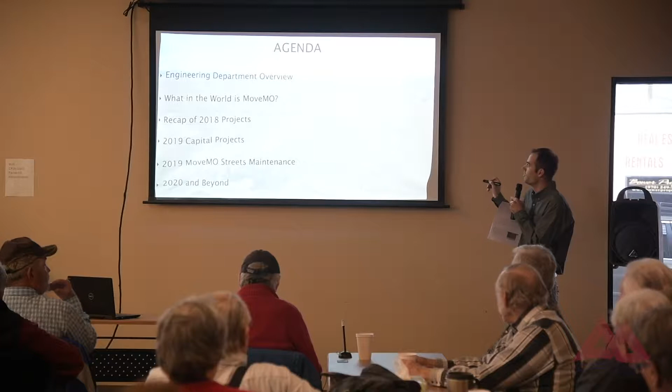She kind of touched on it in the intro, but I'll go in real quick on how the engineering department is set up in the city organization, and what that means for projects and how they come about. MoveMo is kind of a weird name, so we'll talk about what that is, and then dive into a recap of last year's projects, this year's projects, and even going beyond into 2020, some of our longer range planning.

So, engineering, we're right here. This is the city's org chart. We're kind of a lone wolf out here, don't have anybody below us, but we work for essentially the whole city. The Streets department takes care of their street maintenance and day-to-day operations. Utilities takes care of a lot of their main operations. But whenever a project gets large enough that we're having contracted design and construction, generally that's when we take it. We'll manage projects usually over $500,000. We manage those all through design and construction, then also all the construction management and construction inspection is handled by our department. So for everything we'll be talking about today, if you have any complaints, I'm the guy.

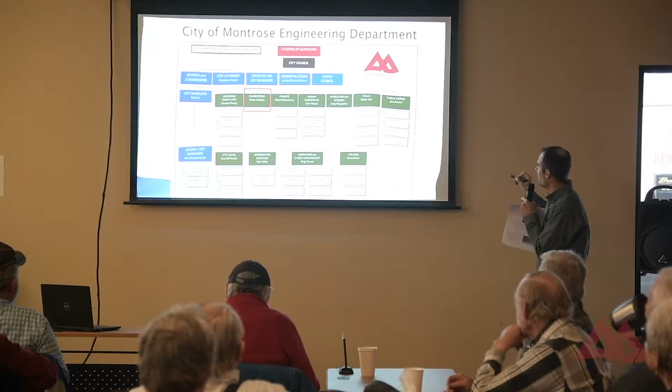And then Public Works was reorganized about a year ago. So we have the Public Works Manager, which is Jim Scheid. They take care of fleet, parks, streets, trash and recycling, and then utilities is its own division—sewer, wastewater, and water distribution. And again, we kind of support them through the larger projects.

So what the heck is MoveMo? Why did we give it such a weird name? It stands for Moving Montrose Forward. Initially it was going to be Move Mofo, and we thought—I liked it—but everybody else thought that was a bad idea, and it wasn't original; everybody uses that when driving around already anyway. So we changed it to MoveMo. We have a website, movemo.co, which I'll show you. The CO, I think, is for Colorado, so you can do anything with website names these days, I guess.

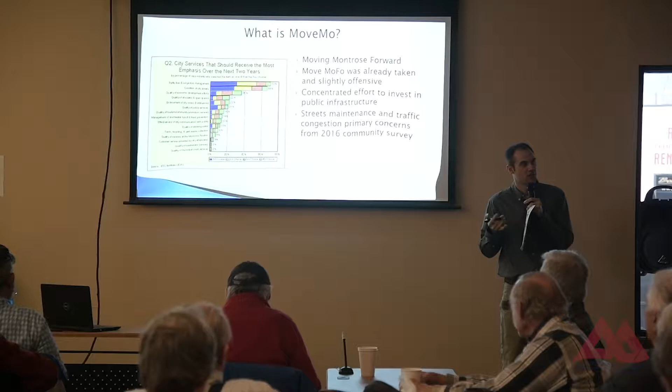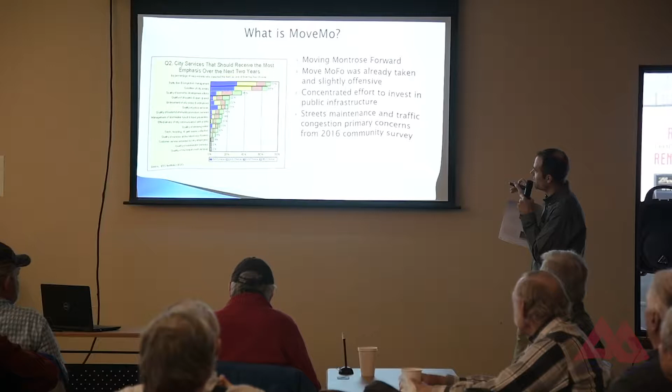But it's kind of a branded effort that came out of, mostly started with, we've known the importance of infrastructure and investing in infrastructure. The recession hit us, just like many rural communities, pretty hard, and we're behind, just like everybody. And people noticed. So the community survey in 2016 asked what people wanted to see the most attention given toward: traffic flow and congestion management, 70%; condition of city streets, 66%; and then all this other unimportant stuff below that.

But the take home, and I was just kidding, that's important.

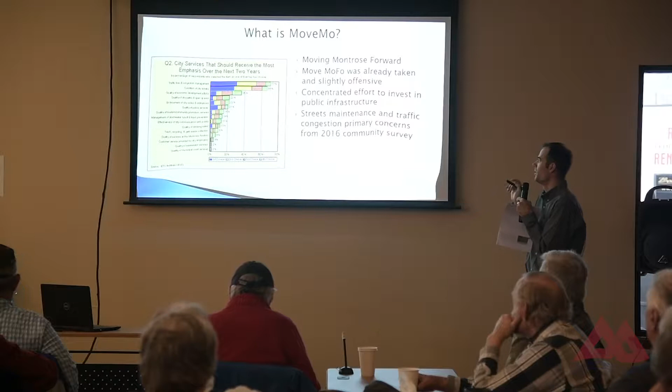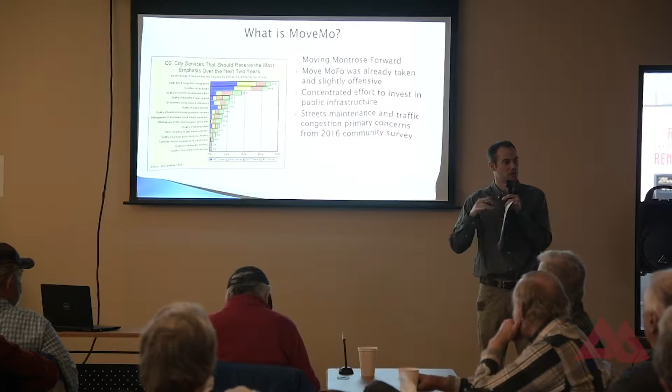The take home here is, by far, you can see how far these lines are from everything else that people care about our streets and don't want to be stuck in traffic, and they're looking for us to fix that. So in response, we've done a concentrated effort to include reallocation of funds, some loan money to try to catch up on the backlog, because as a city we generally have almost no debt, which is great for a municipality, and gives us good opportunities.

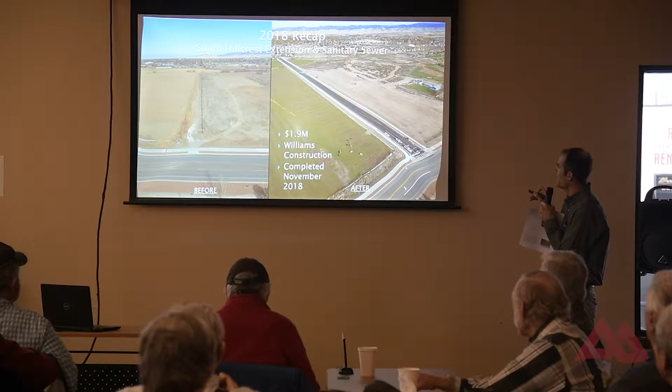Going into 2018, if you remember what South Hillcrest used to look like, this is the before and after. This was completed last November. Came in at 1.9 million, original contract was 2.0 million, so had some cost savings there. They did have to do a little bit of work on the bridge to fix some of the patch work they did incorrectly, and there's a little warranty work left, but beyond that the project is generally complete.

So the Colorado Outdoors project is about 170 acres. The central 40 are now complete, final platted, and lots are ready to go for this project. Great timeline on that.

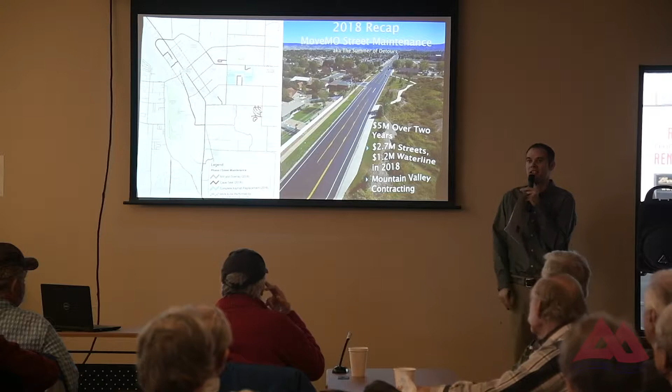You've noticed on some of these, South Hillcrest and Niagara here, we did some additional parking bulb outs. What we've done is reconfigure to our typical template - this has become our standard go-to road template: a through lane in each direction, dedicated left turn lanes to improve volume and safety, and dedicated bike lanes on each side. Between this and what we did up at Rio Grande Park, we added about 3 miles of bike lanes last year, which is great for our bike network - and it's essentially free, since you're striping the road anyway.

Getting a critical mass to the network so that biking becomes more and more prominent, and starting to get connectivity and get rid of all these dead ends.

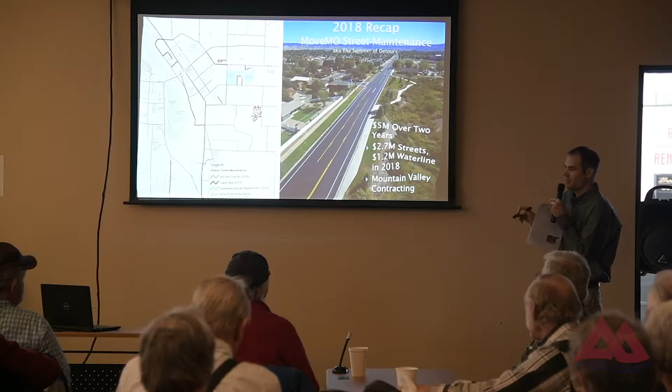Some of the other stuff from 2018 was what was called a Cape Seal. One of the unfortunate things about a Cape Seal is it's black, so everybody thinks it's a pavement overlay, and it's not. It was essentially a fancy chip seal, so we chip seal the road and then put this slurry seal on top, which is a black fine aggregate.

Like Rio Grande, Grand Avenue on the north end, some of these streets, especially Rio Grande, we don't want to invest too much money in because eventually this will get turned into an arterial and completely rebuilt. We don't want to spend a lot if in 10 years we're just going to tear it back out. Some people said Rio Grande is rough, and it is, but it's a matter of using that asset best so we don't waste money and end up taking it back out.

I think that's about it for 2018. There's a lot of utility work—that's what took so long on Niagara and Hillcrest. We have old transite water pipes, usually about 50 years old, or with a life of about 50 years, and a lot of them are 50 years old, which is job security, I guess.

But anytime we do these major overlay projects, we try and replace the utilities while we're at it so we don't have to come back. As luck would have it, with my last name being Murphy, the water line would break the day after you open the road, and then we'd all be in trouble. So we're just trying to look ahead on that. That was the big stuff for 2018.

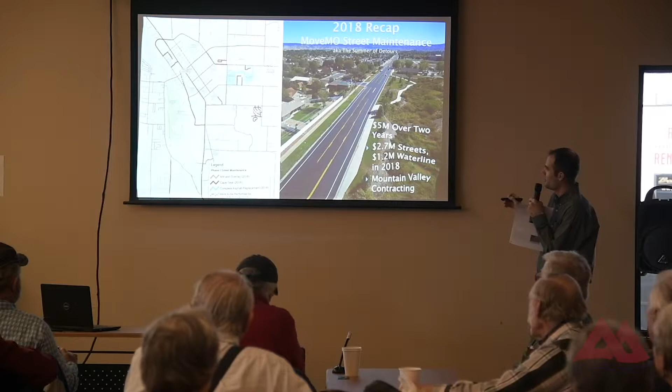There was some smaller stuff, but we've got too much to talk about in 2019, so we'll move on.

Diving into 2019's projects, this is one of the utility projects. You guys may have noticed some digging going along the rec trail down here by Stover's—this is Stover's chocolate factory here. It's kind of tilted on its side, so Townsend runs along the north, and Target is down here.

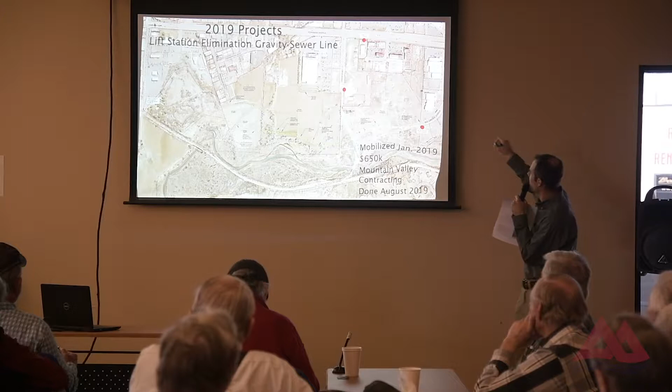Back in the day, they built this development, Home Depot, and River Landing, and with multiple landowners coming across here, they could never get the easements worked out to get a sewer line across. Typically along here, any city will have a trunk line along the river that flows by gravity you can dump all the sewage into. For these, they couldn't get down there, so all of these are on individual lift stations that pipe to a lift station and pump down to the gravity system here.

This one pumps out and down. This one actually pumps all the way across Townsend, all the way down to Oxbow, Williams, Oxbow, and then down by the rec center, which is amazing that was more cost effective at the time than dealing with the landowner issues here. Through two years of working on this, we've gotten through the landowner issues.

We're now putting in a trunk sewer line along what will eventually be the extension of Rio Grande. So Rio Grande, right at the Stover factory, turns to East Oak Grove and dumps back out into Townsend. Long term, you'll notice this is also called Rio Grande down at the light by Target—that's by design, so this will snake along here. The sewer takes a jog out there because of the arroyo, but we'll end up connecting ultimately in that alignment.

That's a long ways out, but we're putting the sewer line in the same place now to get that out of the way, because these lift stations cause us a lot of problems with maintenance liability, and they also produce hydrogen sulfide, which is very corrosive on the rest of our system. So it's costing us a lot of money just in degradation of other portions.

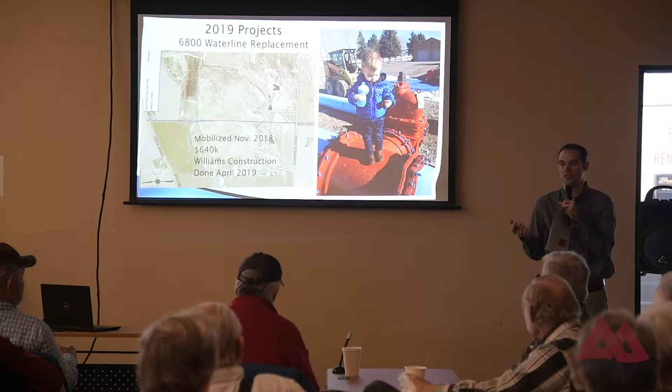Hopefully they'll have that in service here in a couple weeks, which is great. We do these things in the winter to get ahead of it, because summer demand is when our system really needs this kind of capacity. So that's what drove doing these projects in the winter.

Same with the lift station elimination project. In the summer, when they start flood irrigating, the whole valley just saturates from the bottom up, and so deep utility projects get pretty complicated. So we do a lot of our utility work in the winter when the water's lower, and that sets us up to do a lot of our paving first thing in the spring on some of those projects and get those buttoned up before traffic gets even busier.

And this is the fun one. They're all fun. This is the funnest one. We were having fights over who gets to manage the construction of this one. Ryan lost, I'm sorry. So Josh Sickles from our office.

Yeah, so the funnest project. If you look at this map, the blue are our existing parks, the orange are the existing rec trail network. If you notice, there's a lot of awesome stuff right here, but all the people are over here. That's been a problem for the cities. We have this gem, an absolute gem of a park system down here, and no way to get to it, especially for the kiddos.

It really came to light when we were designing this, and I had to stand for 15 minutes just to get across the street here at West Main. And I'm an adult.

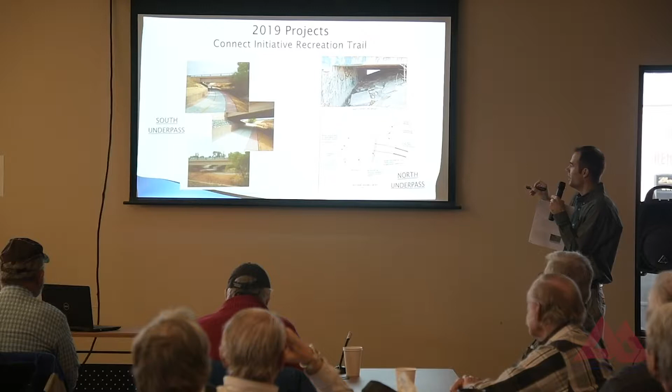This is over the City Market Bridge. This is what this one will look like. This one's got a little more room, so you'll have just a little retaining wall on the uphill side, carving out underneath the bridge. And going back, that work is being done.

So fortunately, going back to all these, Mountain Valley Contracting, Williams Construction, Western Gravel Constructors, all local contractors, which is great. So we're getting all this external money, and we're able to use it not only to keep the money in our community, but also get the skill set and keep good learning opportunities for all of our contractors to have these unique, challenging projects and keep that talent local, in addition to the cost, which is great for future projects.

That work will be done, scheduled to open this winter. Here's a couple pictures of the construction underway.

So this is Mayfly's new building. Kind of had an opportunity to get this retaining wall out of the way. Just a couple pictures out there. These are prefabricated blocks that they just put on a flow fill footing and snaking the trail back through there.

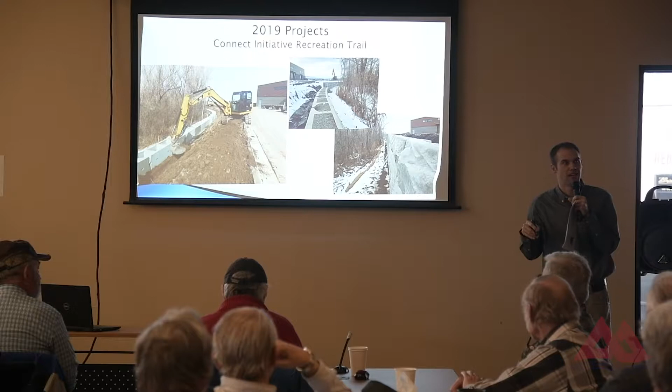That's where it got really tight. A lot of this is up against wetlands, all that river corridor, so we have to map the wetlands and make sure we stay out of them with the project. To mitigate wetlands is $350,000 an acre. So we don't want to go in the wetlands. The wetlands are good. We want to keep them.

The other number 2 fun project for the summer, the Miami Hillcrest Roundabout. So this picture shows the footprint of the roundabout. You can see it's a pretty big project.

So it starts all the way up here, past the north end of the Crossroads Church here, goes all the way down to Cherry Street, and then both ways here. It's a lot larger diameter.

It's about the same diameter as the one on Woodgate because of the skew. So you have a pretty skewed intersection, so to be able to still get your trucks through there and maintain all of your geometry to meet standards, it ends up being pretty big.

And then all the really fun stuff. So all these lines are the various utilities that'll be installed as part of that work. So people always ask, can't we keep it open and do it half at a time? And that's the reason we can't. It can be done, but it would add $500,000 to the project.

So we just kind of bite the bullet and get it done quick. We've just advertised that. Talked to council Monday, they're scheduled to vote on contract award mid-March. It's a $1.7 million contract.

This is K&D Construction. We've never worked with them before, but they come on good recommendation. They're out of Junction. But they're using Bernhardt Construction for concrete and Chuck Distal for a lot of the utility work, so a lot of that work still will stay local, which is great.

We're doing this one a little unique. We gave them a closure window, and we actually negotiated it down to 4.5 months. So once they close the road, they have 4.5 months to open it, and done before November. We're still working out that schedule, but I'd guess about mid-April you can expect this to be closed.

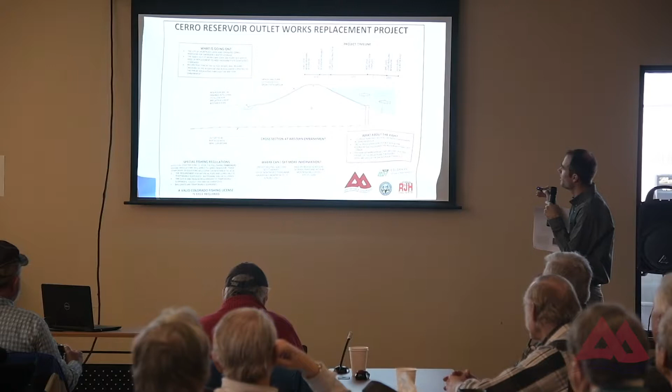Built in 1912, so as you can imagine, stuff built then is about at the end of its life. It has an old 8-inch pipe, part steel, part transite, underneath the embankment, down 50 feet from the top to get to the pipe. That's undersized, essentially at the end of its life, and needs to be replaced.

We don't use this reservoir primarily for our drinking water. Most of it comes to Project 7 through the Gunnison Tunnel, with trans-basin diversions, because our rights sit with Ridgway Reservoir on or through Tri-County. But we do hold some rights to this as an emergency. If all other supply failed, say worst case the Gunnison Tunnel collapsed, this could keep us in water for a month, maybe 3 weeks, or even 3 months.

We drained it this summer. The reservoir also doubles as a state wildlife area now. Through an agreement, we traded out Chipeta Lake for this. It's managed by CPW for the fishery, and we're working with them to reestablish the fishery when this is done.

We drained the reservoir slowly over the summer, because if you drain it too fast you end up with water trapped in the sides, and you don't want it to cave in.

It worked out really well, gravity was on our side. We were able to do a siphon up and over the top of the dam. Once primed, just like siphoning out a water bed or a swimming pool, it flowed completely on its own under gravity. We were able to dump all this water into the Vernal Mesa Canal, or Vernal Mesa Ditch I think they call it, which goes out to Bostwick Park for irrigation water.

So none of the water was lost, which is a good thing, especially last year. It's just that much more water they're able to use, because Silverjack dried up pretty quick.

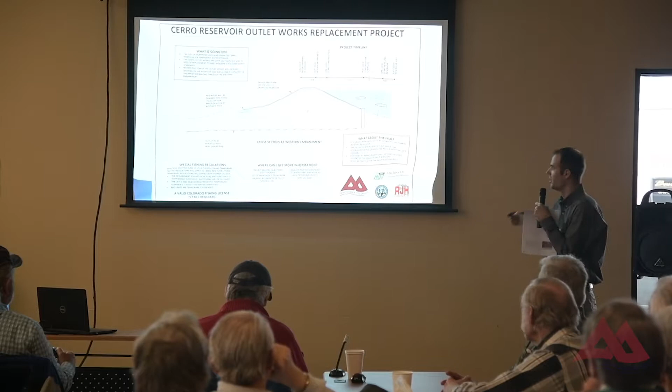That work is being managed by RJH Consultants out of the Front Range. Usually we manage all of our own projects and inspections because it's state regulated, and that's a whole other level of oversight. So for this one we've actually hired consultants, and it's kind of turnkey. They're taking care of that project.

You can expect it to be refilled next spring. By the time we get done and get acceptance and an order from the state to refill, the water will be off for the year, because it's filled off of the water that comes out of Silverjack. So that'll happen next spring, and then we'll reestablish the fishery with CPW.

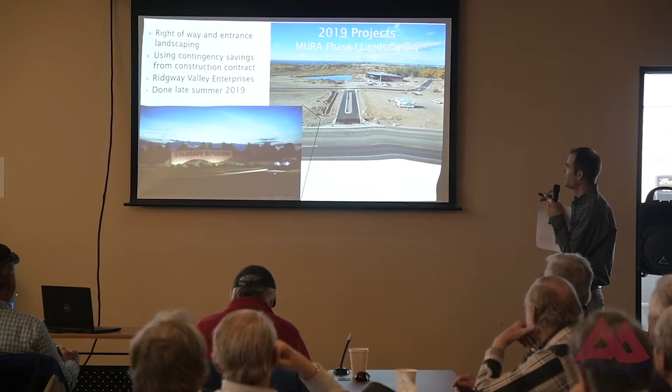Out on the MURA, this is Mayfly's building. Like I said, we saved about $800,000 in the original construction contract.

That's now kind of freed up for some of the common area landscaping. So this is the entrance, monument signage, kind of landscaping that'll happen on both entry areas, and then we'll probably do the right-of-way within our street landscaping. As buildings come online, they'll individually landscape their own frontages. That work will be going on this summer.

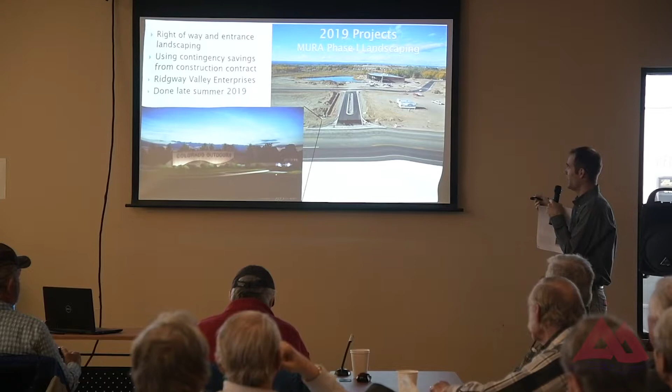Beyond that, most of the URA work is complete.

Another group project, River Bottom Drive. This is Holly Park, one of our rougher parks in town, I think built in the 1970s. Is anybody from the Rec District here? Through their community surveys, it was one of the highest priorities.

And then River Bottom Drive, we've all been on that. We all know how fun that is, trying to get out of an event.

So we teamed up, went after DOLA money, went out to— what was the name of it, Burlington, go to Kansas and turn around— for an interview with DOLA, and got $500,000 from them.

And that was Barbara's joke, by the way. I gotta give credit.

Everything looks to be a go. So we probably start after all the programming is done in September, get a lot of the base work done. The county also partnered on this project.

To get the full template in here: get sidewalks down both sides, formal on-street parking, pipe the ditch, solve a lot of the safety issues, dedicated pedestrian crossing, flashing crossing, get the intersection lined up so it's square so you can get out safely, get dedicated right turn lanes. Really just make this what it needs to be, because we have this gem of a park system and a not so gem entrance.

And then combined with a lot of the improvements at Holly Park, the Rec District will be doing their project independently. We'll bid them at the same time, and then the city will be managing the street construction. The goal is to get that at least based before spring soccer.

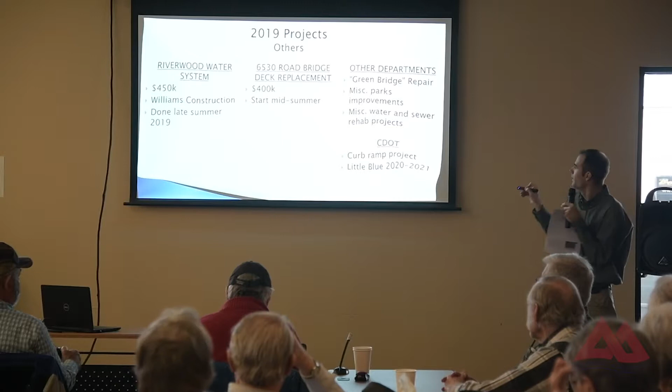Parks is looking to repair or replace the Green Bridge, the one off of Home Depot - the rec trail across the Uncompahgre River just behind Home Depot. That's the rail car one - it was an old rail car. A couple small parks projects, water and sewer rehab, typical stuff.

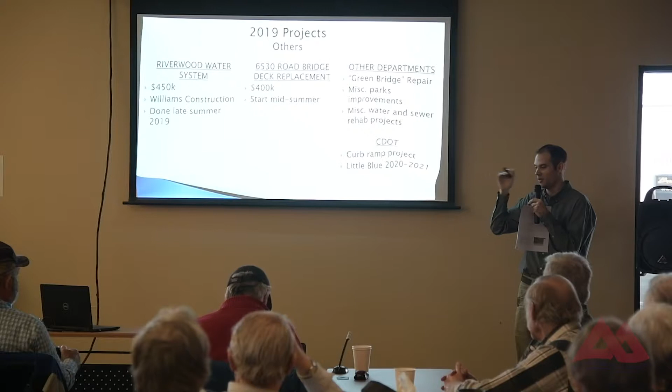Also a plug for CDOT - you'll probably see late summer they're doing a ramp project on San Juan, Townsend, and West Main to replace a lot of the curb ramps, ADA ramps on the sidewalks to make those compliant. A lot of those are non-existent or non-compliant.

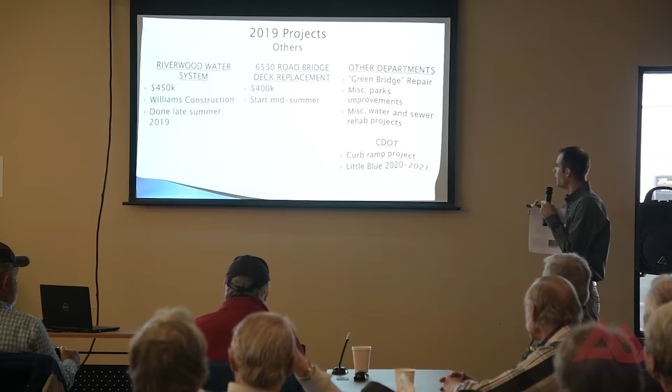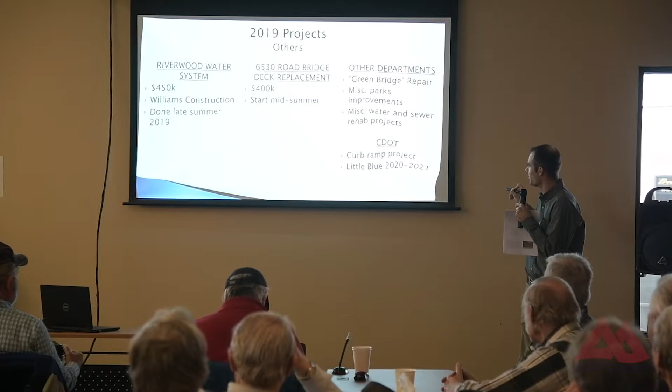And then the fun, or hot button one - Little Blue, still looking like 2020 on that, where they might have intermittent closures of Highway 50. They're still working out the details on how and when all that happens. I've generally been out of that loop, but I just wanted to let you guys know it's coming. There's a website for that if you want more detail on the project. But that one will be pretty impactful to our community.

So, it's a long project. I'm tired just talking about it.

So then the other piece, like I said earlier, we have $2.3 million left for street maintenance this year. And what we're trying to do is spread the love, so hit a lot of places in town, all throughout town, not just any one area.

And there's some roads that are admittedly pretty bad, that have probably fallen off the cliff. So you have this condition curve, and you hit a point here where you just fall off the cliff. It's like painting your house - it's cheaper to paint your house than to replace your siding.

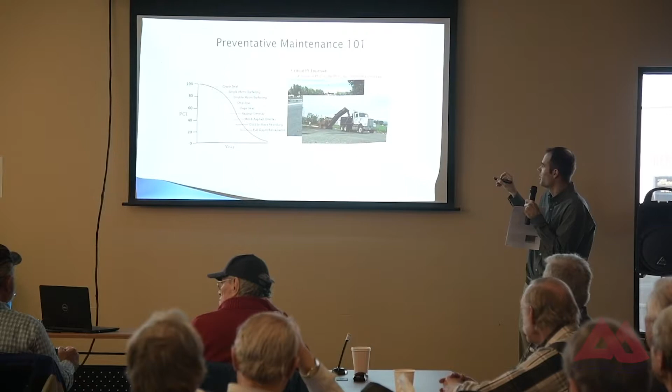And so we have some that we can bring back by small, cheaper surface treatments. So at the top here, that's where you fall off the edge. At the top you have crack seal, chip seal, some of these cheaper mill and overlays, some of these cheaper treatments. But once that fails you, then you're into this - up here you're $1 a square yard, down here you're $15 a square yard.

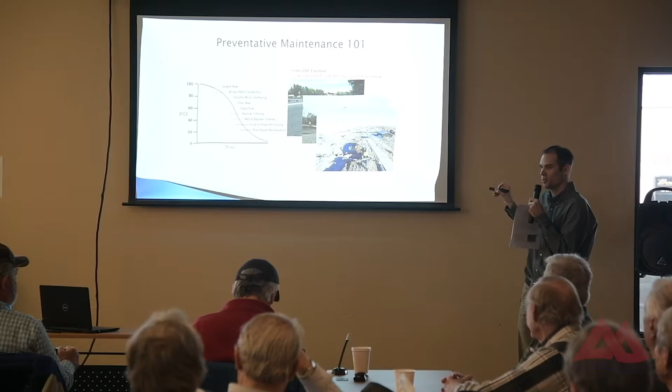So, kind of the adage on street maintenance is bad roads stay bad for a long time, unfortunately, because if funds are limited, we're going to spend them keeping the other ones from falling off the cliff. Because if we just fix the ones that fall off the cliff, they'll all fall off the cliff. And it's not probably unique to Montrose. A lot of communities have all these road networks, and it's a challenge to keep them up, admittedly.

We use ground penetrating radar, which is a little machine they run behind to look at pavement thicknesses. Ryan, back when he was in the streets department, would do this horribly complicated spreadsheet, just to give you a feel for the work that goes into it.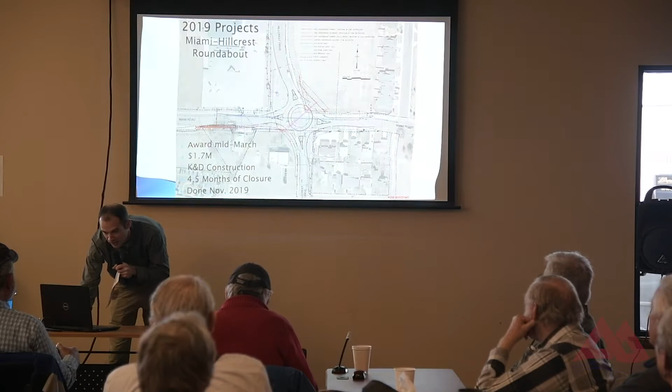So anyway, this is the work that goes into the prioritization of streets and the modeling of how much money we need to be throwing at it and where to put our best bang for our buck on our money. I would never dream to - this is a Ryan thing, he's the mastermind behind this. If you have questions about this spreadsheet, feel free to ask him. But at the end of the day, there's a lot of work that goes into figuring out where to spend the dollars and spend them right, because admittedly, I think we know we'll never have enough to get it all, and so we got to do the best we can with the resources we do have.

A couple chip seals, overlay Odell if funds allow - and that's the caveat on this. We have 2.3 million and we'll go until we run out of money, so we're prioritizing within this list. So some of the stuff you see on here may not get done.

Pavilion's another big one. Anybody's driven out Pavilion lately, that one's in pretty rough shape. And that's the definition of right on the verge - in a couple, 2-3 years, Pavilion would get pretty bad.

And then crack sealing - crack sealing is kind of your best bang for your buck. So we're going to do a lot of catch-up crack sealing contracts, some of it trying to hit a lot of old town, and then city crews doing some of this work, because that's up in your dollar square foot range versus 15. So the single most important thing we do, in my mind, is crack sealing, and we just need to stay ahead of it. And then the in-house stuff, that's all done by the streets department.

So here's the website, movemo.co. It'll redirect you there, or you can just type in movemo.co directly. You'll find project updates, closure notices, and you can peruse current capital projects with before and after pictures of recent work. There are also maps you can click around on for street maintenance info, so if you forget what we tell you, you can click on the streets to see what's going on. We try to update that, and during construction it gets updated weekly, sometimes several times a week.

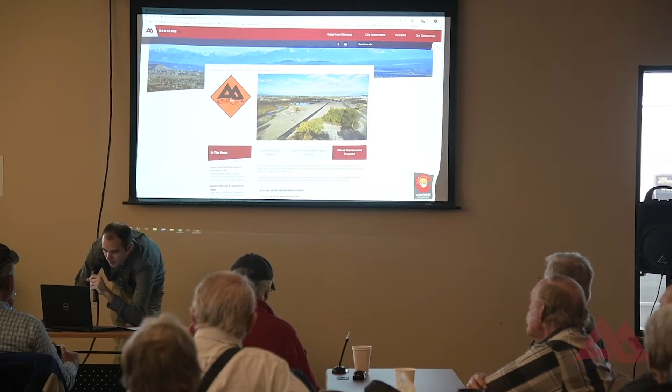All right, now I've got to figure out how to get to the other part. Then we're almost done, that's the good news. Everybody's getting tired.

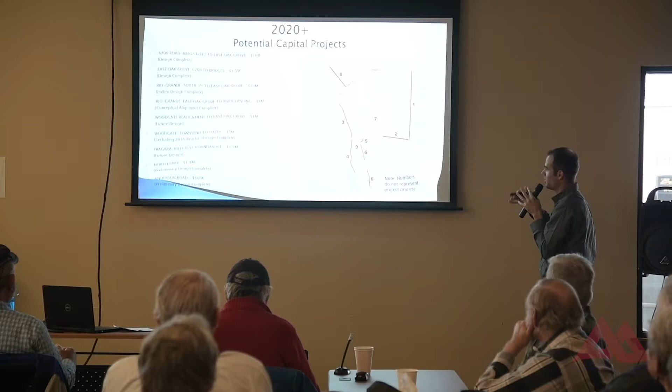So, going into the future, there are a lot of projects out there. I wish we had a lot of money to make them all happen. This is kind of a picture of capital projects, so this isn't your typical street maintenance, but projects that are generally in the hopper and on our dream list.

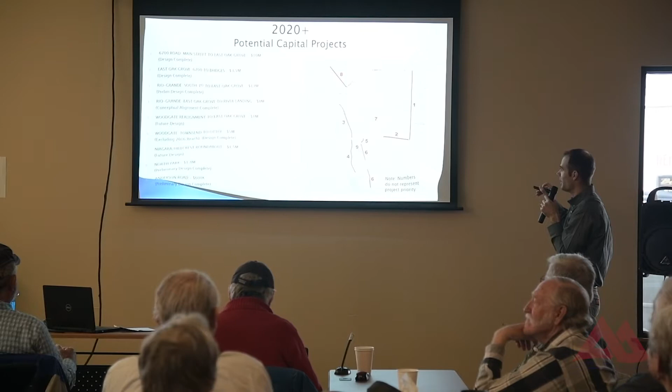Some of the more notable ones: Rio Grande Avenue. We have to buy the right-of-way from the railroad to make that happen. You're looking at about $13 million by the time that happens. Typically we've had $1 million a year for capital, so that gives you a feel for how expensive some of these projects are. Preliminary design is done on that one.

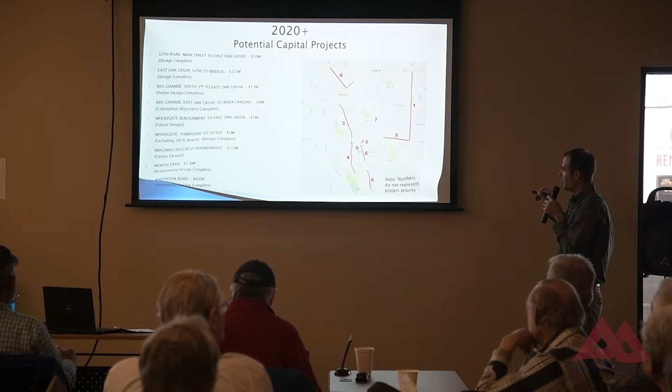One we've been talking a lot about lately is the Woodgate realignment. With the Hillcrest Extension coming down, if you come down Hillcrest and want to go to Target, Walmart, in the south towns, you either have to shortcut through the neighborhood or come out to the light, which makes this short stretch before Woodgate a really big bottleneck on Townsend. So we're doing studies to look at the impacts of South Hillcrest on this neighborhood and the shortcutting volume. If that creates the basis, we've had a landowner we've come to a stalemate with on negotiating the right-of-way purchase, so it might go to eminent domain, and we need all that to hold up.

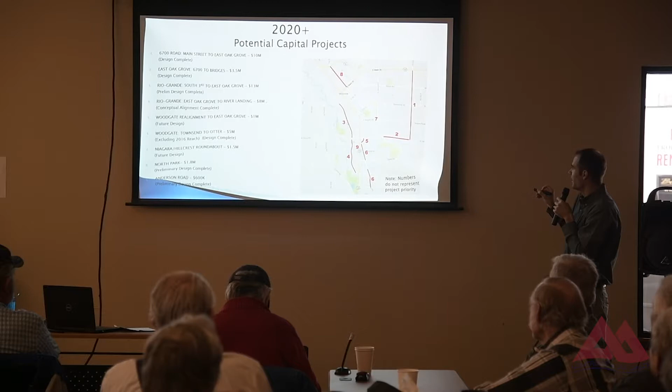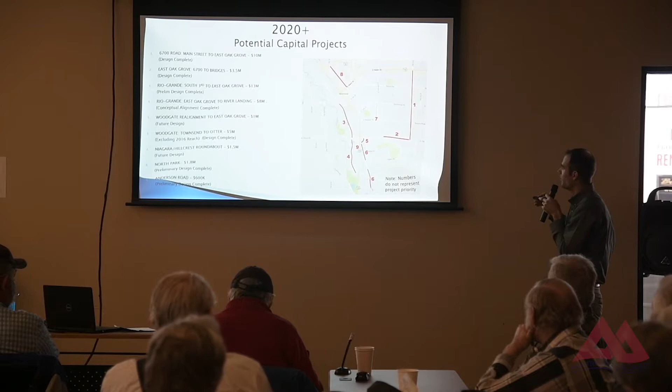We need to make the case to do that. So that's what we're looking at in the near future: a roundabout at Niagara and Sunnyside, or Niagara and Hillcrest, and then general reconstruction projects. Reconstruction of North Park, extension of 6700 Road—at some point this will get reconstructed—extension of East Oak Grove, reconstruction of Woodgate, extension of Rio Grande, paving of Anderson, all these things. These aren't given any priority by any means, they're just meant to illustrate all the stuff that's out there. So 10, 20, 25, 30, 40 million plus dollars of work that, if we won the lottery, we could build today, but it'll take some time to implement.

I think that's it. Whew, that was a lot.

Thank you so much. Is it working? Hello, hello, I'm still not familiar with this technology. I can talk loud—okay, thank you so much. I so enjoy hearing about progress, and also understanding what the limitations are going to be for us and the detours that are going to be happening this summer, etc.